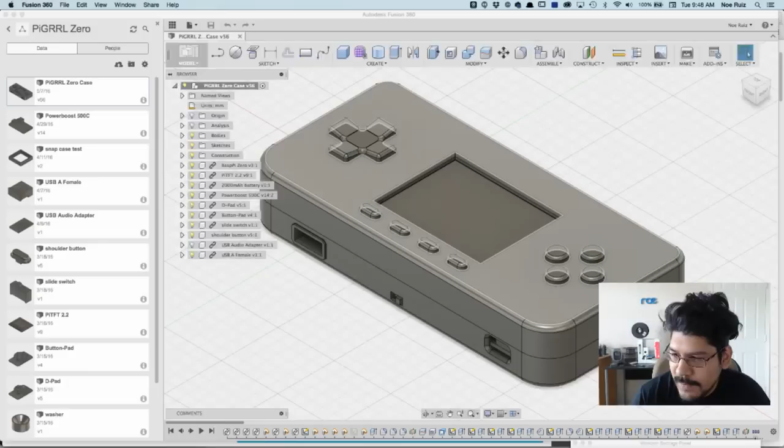So that's pretty much it there - covered the Pi, the availability of the Pi, and what we're going to do. So if I open up Fusion, I already have the case open here.

So this is what we're going to be working with.

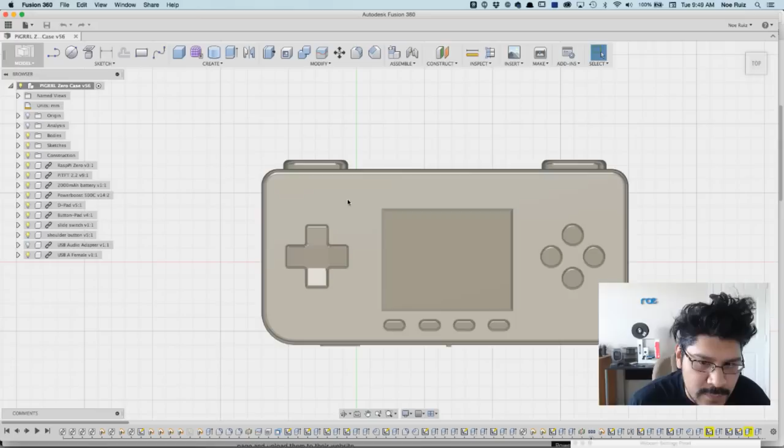All right, first thing I'm going to do is some duplications. I will duplicate this case because I want to have a copy of it. To do that, I'm going to save some resources and hide all this stuff here, all the components. I'm going to go ahead and hide them, right click, show and hide, so that way I only have the case.

I still have, let me hide that one there. Okay, you get rid of, oh yeah, the bottom there is still there. Okay, cool, so I'll make some copies of it. To do that, I have to right click, hit copy, and then up here I hit paste. And it makes a copy.

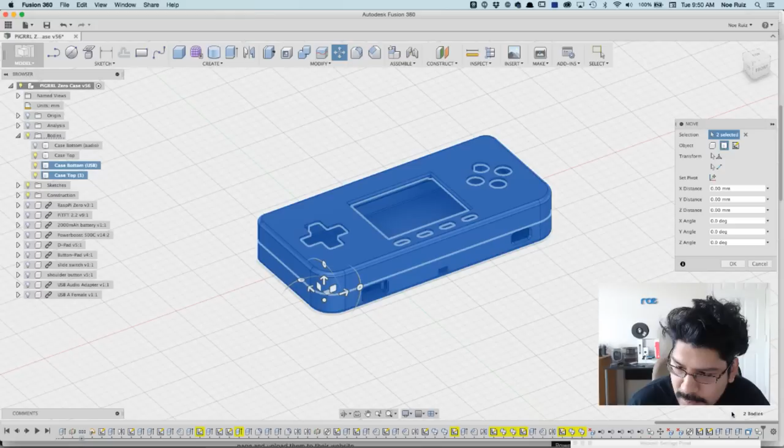Hit OK. I can actually make 2 copies here. See the selection thing? Maybe I can make 2 copies with one go. Cool, I think so, 2 bodies down here in the right corner. It says 2 bodies, I think that's the way to do it. So hit OK.

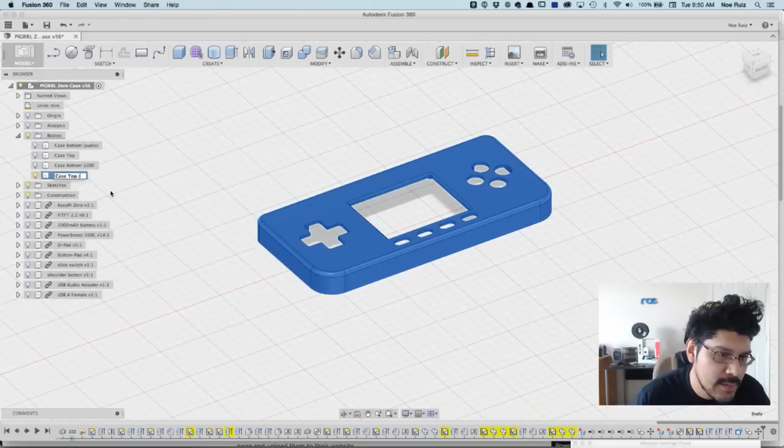And I don't think it did it. It did the top copy, so I have 2 versions of the top. So what I'm going to do is I'm going to rename this one to top, then split, then A, because I plan to make 2, like a left and a right, an A and a B. So that's the first one, and then the second one, which is this guy over here, I'll have to do the same thing.

I'll have to copy, and then go up to the main component, the main assembly, and then go paste. It'll think about it, and then I'll hit OK. And you can see here in the timeline it has added those copies and movements to the timeline, so you can always reference it or go back to it. So okay, I'm gonna name this one split A as well, and that's what's gonna split.

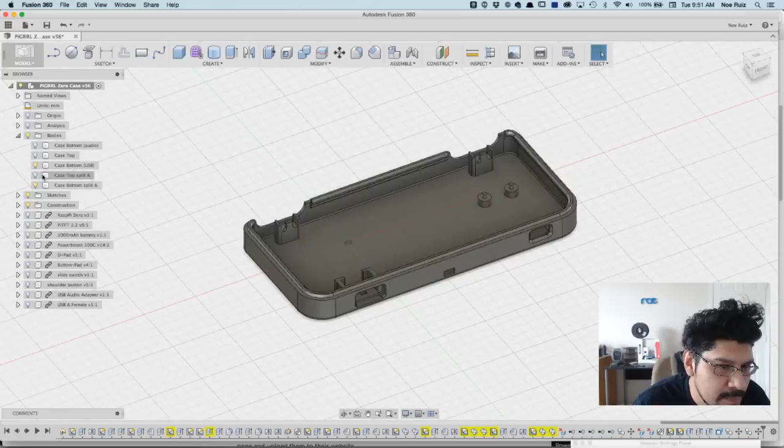All right, so we got our bottoms and our top. Let's start with the top because that seems to me to be the most challenging one. So I need to figure out where the center of this is, and I do have a construction plane that I created that cuts right in half of it, which is right there, I believe, but I'm not sure if I can reference it when I'm drawing a sketch on top like this. So what I'm going to do is...

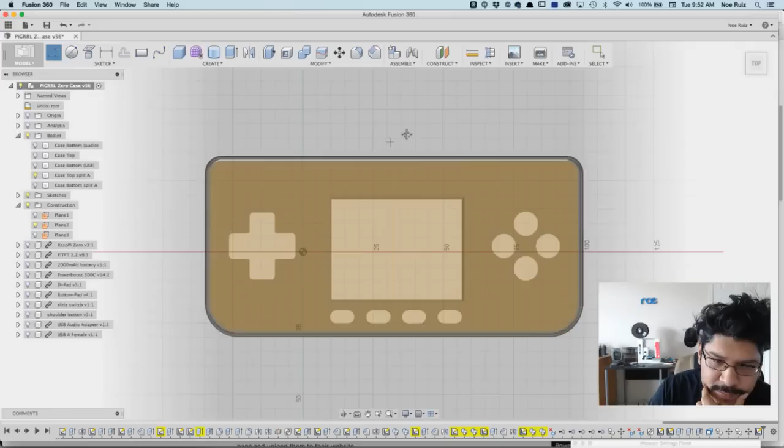Let's go ahead and make a line. I'm going to use not the spline but the line tool, and it's going to ask well, where do you want to cut? I'm going to click on the surface of the top case, and Fusion's going to make a projection of that, sort of outline it out, just a projection of the surface. So all this is projected, and I can reference all these lines and stuff.

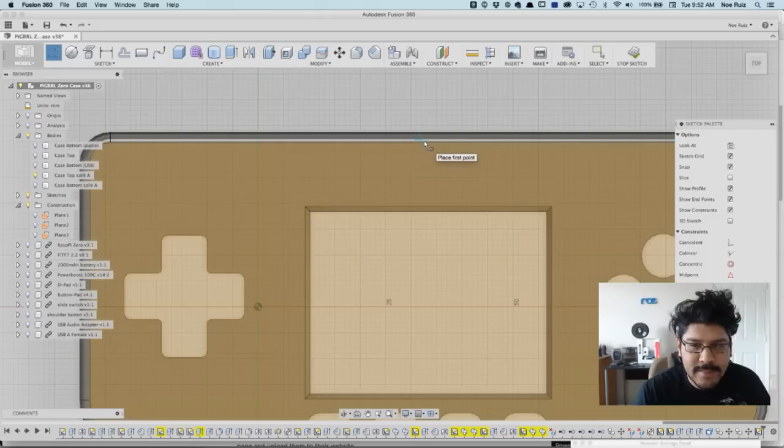So if I roll over here using my line tool, I can find the center spot, and that little triangle you may or may not be able to see, the little triangle with the X signifies that it is the center. So I'm gonna click on this, and now I can start drawing out my cutting thing. I get to choose how big the finger joint wants to be, how long it should be, so I'm thinking probably 4. I'm just gonna type in 4, then click.

And then I'll draw it out a bit over here, so probably 4 to keep it the same. Click, 4 again, click, and I think I have enough room to make just one cut.

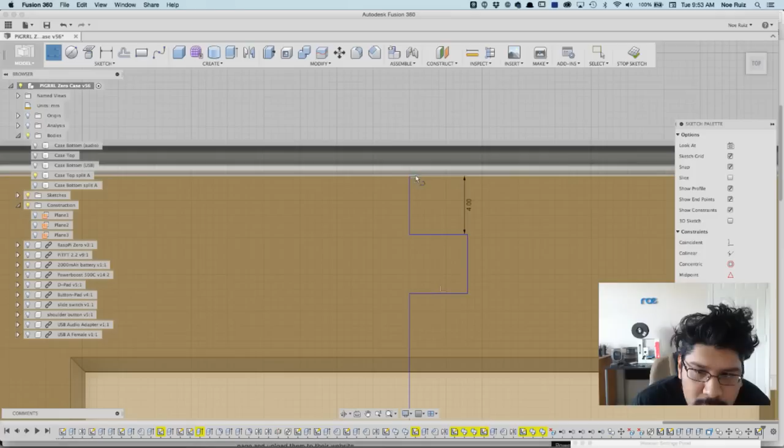And then I'm just going to cut this whole thing down like that. I'll hit escape and drag out this over here. I probably won't be able to because it's locked. Yeah, it's locked, so I'll just continue the line with a separate line and just cut there.

Alright, so that seems to be a good way to go about it. I think that will be okay. I'm going to cut through the whole thing using this line, so hit stop sketch.

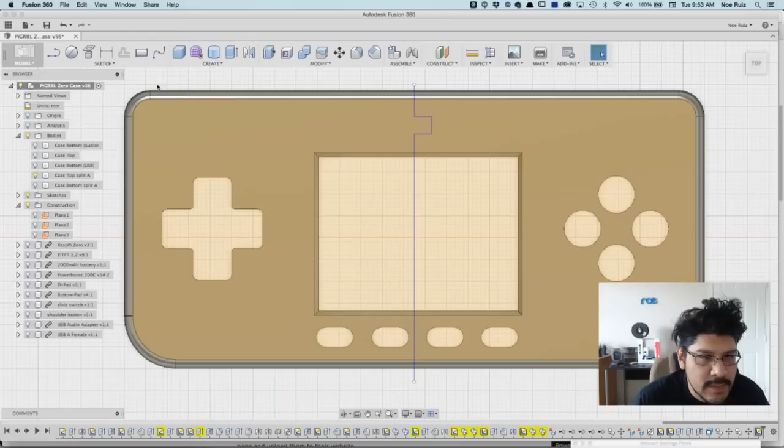So now that I have my cutting tool line thing, I'll come over to the model workspace, and go to patch, because patch allows me to extrude a single line, or this series of lines that makes a single line. So I'll go to create extrude, and click on the lines that we created. This one, oh, magically it selected the whole thing as one. If I start dragging up the little manipulator here, you'll see that it's gonna extrude that single line as a patch. It's not a solid yet, but it's a patch.

And I'll change the direction to symmetric, that way you can cut through the whole thing here, the whole enclosure like that.

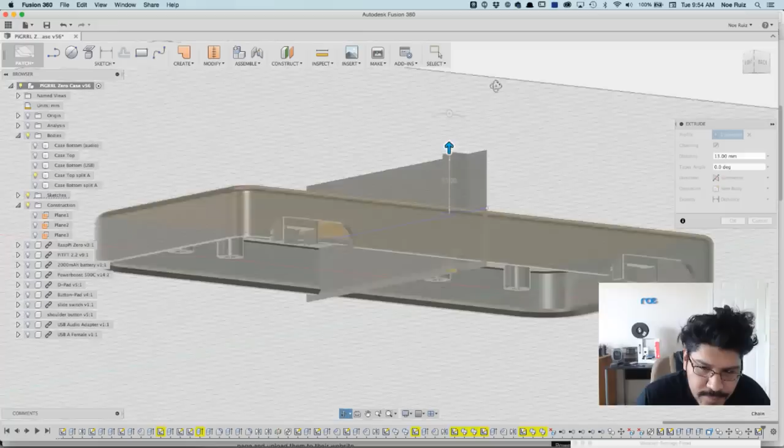What I'm thinking in my head is I'd like to have another key here, but I would have to draw a new profile thing, so maybe I'll work with that in a little bit. Let me just get this first incision, and then we'll work on these layers, or this surface, the plane. So I'm still extruding, I'll go ahead and hit OK.

And now I have this patch. If you go to your body, you can see it has a different icon. See, all these bodies have a solid icon looking thing, a little cylinder. Well, this one's just telling you that's not a body. Even though it says body, it's a patch. So we need to thicken this up.

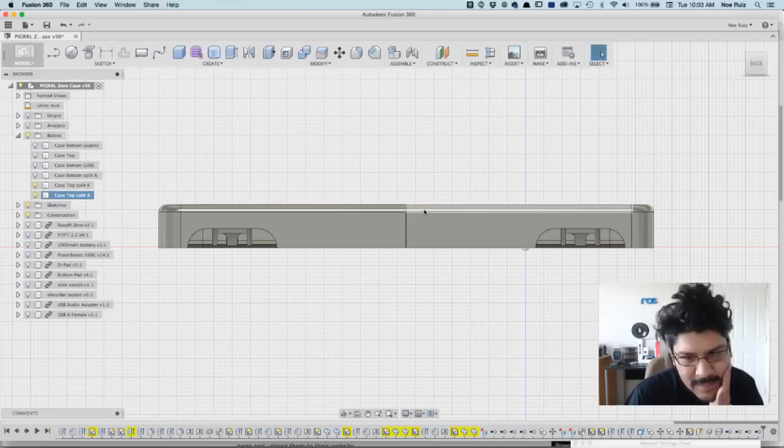So what I need to figure out is how do I add a finger joint to the side of the case here, so that we have more points of friction, giving it a better snap fit. Since it's already cut, I'm not sure how to go about it. I think I could just draw on it and then cut it and then combine the thing. I don't know, we'll see here. Yeah, I'm not sure how I'm gonna do it.

I could just try doing it and then sorting out how, because I have the gap here already, so I wonder how to do it. Obviously, as you sketch, you can't sketch on two different planes at the same time, so it is a little bit of a challenge. It's a mental challenge because I haven't done that before. I'm not sure how to go about it.

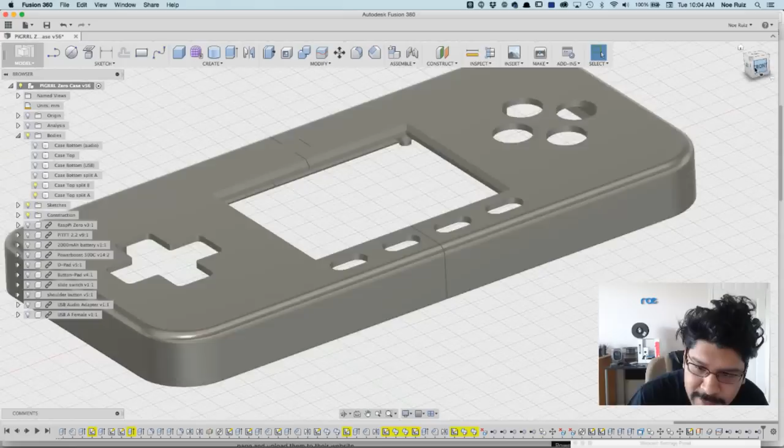So you see how I have that, I just need to rename these. Okay, so I'm thinking in my head, I should bring back those little split cut pieces because I can use those to fill in the gaps, right? So I might need them. So let's call this the cutter top. I know it's the cutter top because we're gonna have quite a few layers, especially with all the planes.

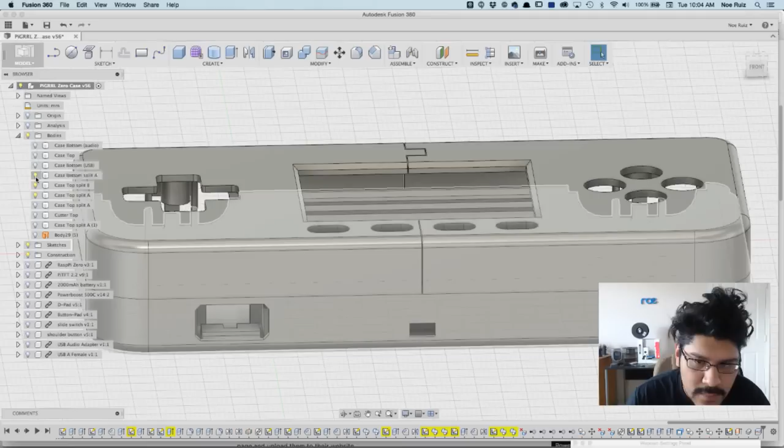All right, let me bring these back one by one. I'm already getting confused. Here's this piece. Let's call this like a bottom. And then I think this one, yeah, this one would be a top. Like that. Top. Like that. Alright, so that way we can use these to merge into the piece because we need to fill the gap and then remove the gap on the next tool. So we'll see how that works out.

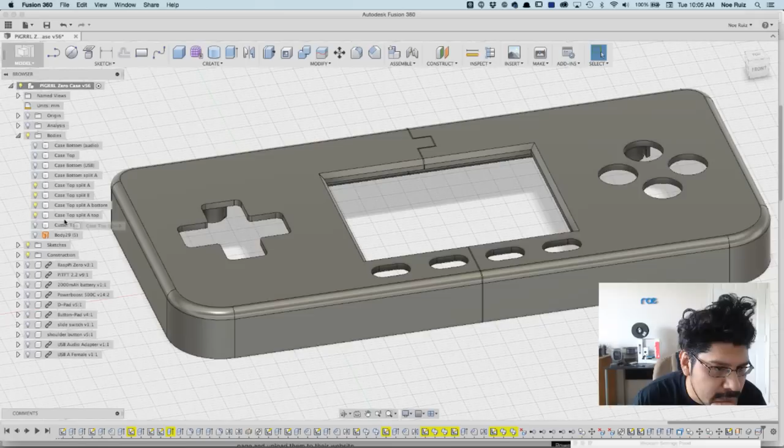But for now, let's hide them. So maybe move them to a better spot. You can just move things in your browser to sort of make more sense of it. I think I'll move split B up here. Yeah, that should be okay. Wait, yeah, let's put it back down there. All right. Maybe down here. All right, that's gonna work hopefully. All right.

You know what I could do is, because I'm thinking in my head like, hey, what's gonna be the exact center? I could just hide all these guys and then bring back the regular case and then just sketch on this one so that it's not cut yet. If that makes sense. So let's go ahead and start with the line tool again. I'll click on this plane, this surface of the case. That way it's sort of referenced. And again, I can just find the center point by hovering over one of the lines of the projection until I get that triangle thing.

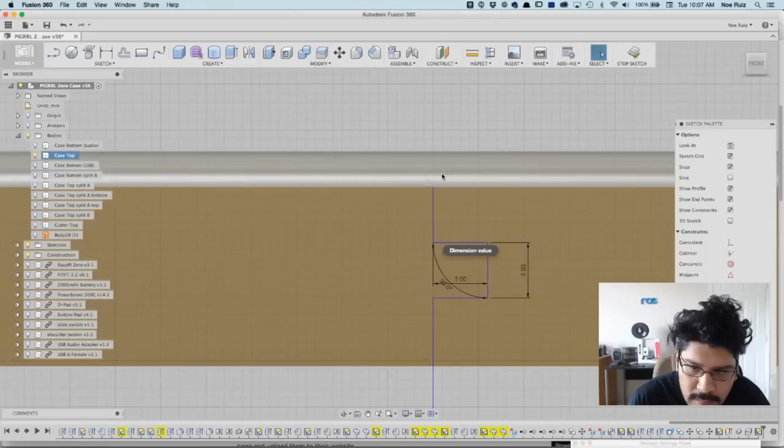I'll click on that, and I'll use the same 4 millimeters, probably 3 because it's shorter, obviously. So 3, make that 90 degree. Click 3 again. 3. Oh no, I locked 3 and then 90 over here. Click, bring it back, and then bring it all the way down. All right, and then arc again to complete this guy up here, like that, and then escape. All right, so I got that. I hit stop sketch.

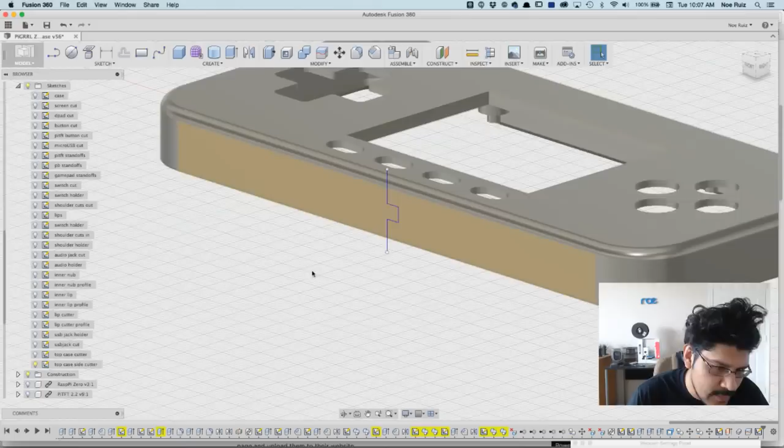And we'll need to do the same stuff. Let me go ahead and hide. Well, maybe leave it for a second. What I want to do is start naming my sketches. So I'll call this one top cutter. Then I need to say top side cutter. I should probably put top case to specify that this is the top of the case and it's a cutter. All right, that'll be fine. I could get more granular with the name, but whatever. I know what it means.

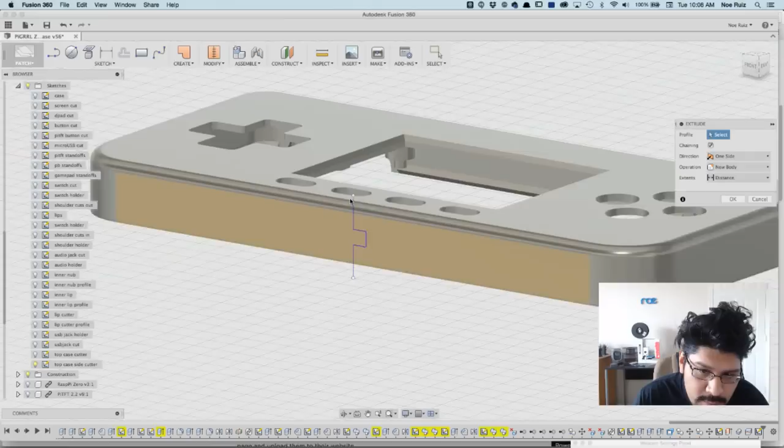So let's go back to the patch. We'll go patch, go to create, and we'll do an extrude of the line we just made, like that. And drag it out all the way this way. Zip. And yeah, that should do it. I'll hit OK. So I'm trying to cut the whole thing here, and there'll be a key or a finger joint right there, just one finger joint, and go again.

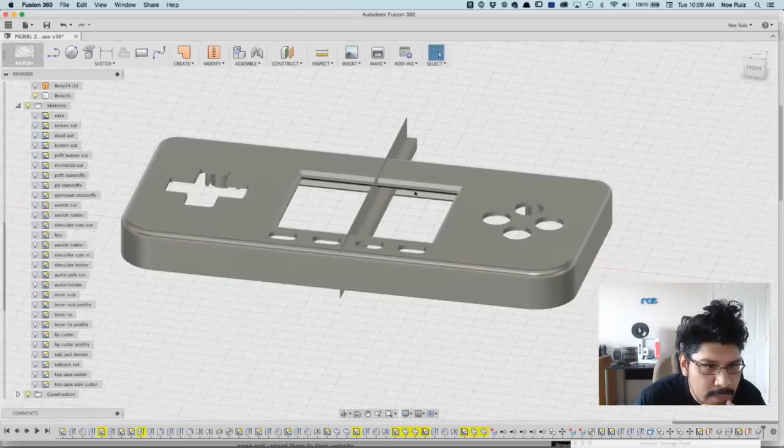And go back to, oh wait, I need to thicken it. So go to create, thicken, select your face, and there's the thickness already set for me because it remembers. It's like a history thing. Okay, 0.2, that's what we want. Hit OK. Now we have our cutter. Call it cutter side top. There he goes. Now we'll switch from patch back over to model.

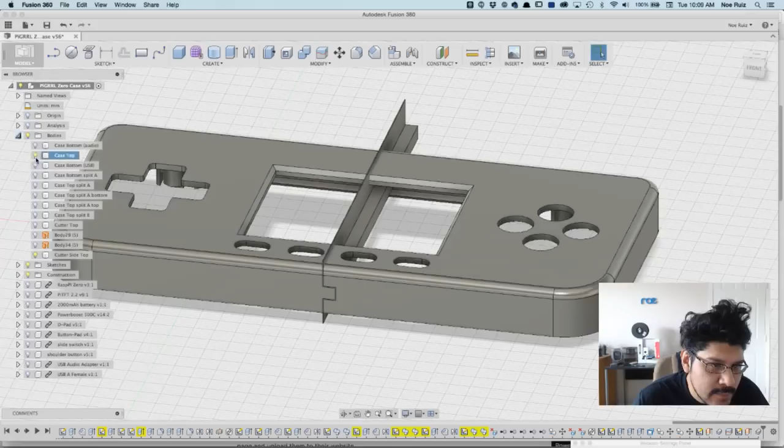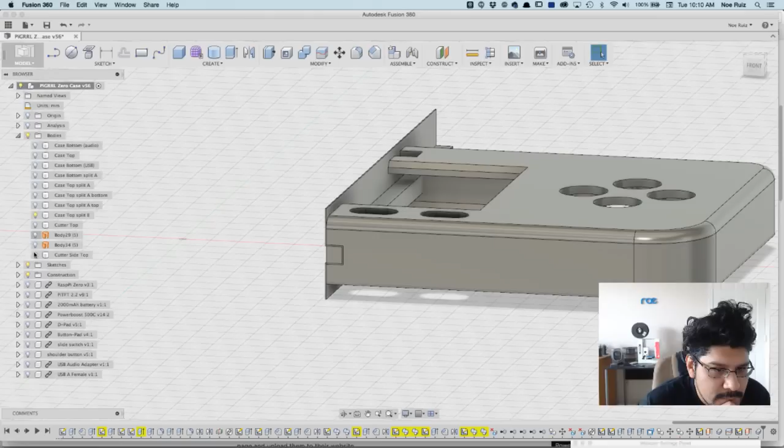Go to split body. And instead of splitting this guy, I think I should split the actual split case already. See how that would go. So let me hide top case, and then bring back, that's the cutter, that's B, and this one's A. So I guess we will, and there's a gap there, obviously. I'm curious how this is going to work out. Silence. That's the thinking happening.

Huh, and there'll be an overhang too. I'm thinking about, since it's going to print this way, we're going to have a bit of an overhang issue since it's just going to be like that. So maybe it's not a good idea to add a finger joint here. You see what I'm saying? Like if I cut this, then I have this 3mm bridge, which will certainly sag. So that's not good. So maybe that isn't a good idea. Wah, wah. Yeah, I don't think it's a good idea, guys.

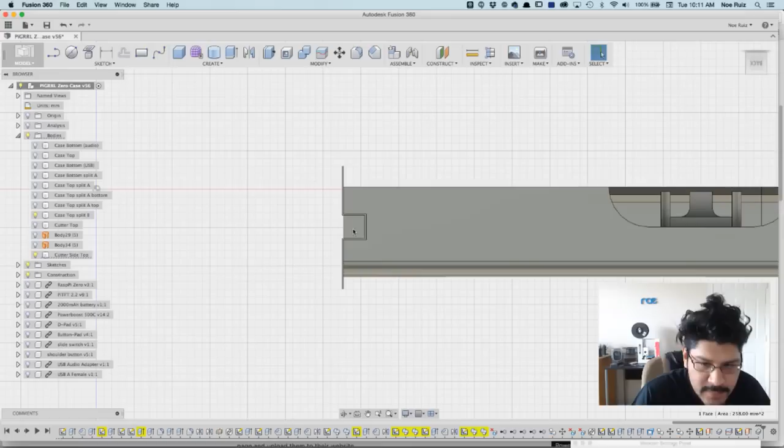I could change the shape to be a bit of a chamfer, you know, like make it like a triangle or something, like a 90-degree finger joint. But then you're still gonna have a bit of sag because it's just printing like this. So maybe this is gonna be the way to go, because I'm just gonna add more complexity to it. So maybe this is the right way to go. Just have one finger joint. It's better than having no finger joints, I think. What do you guys think? I'm curious to hear what you guys think.

Over here. Make Lego blocks from the case, says Yanni. Benny Hill. Yeah.

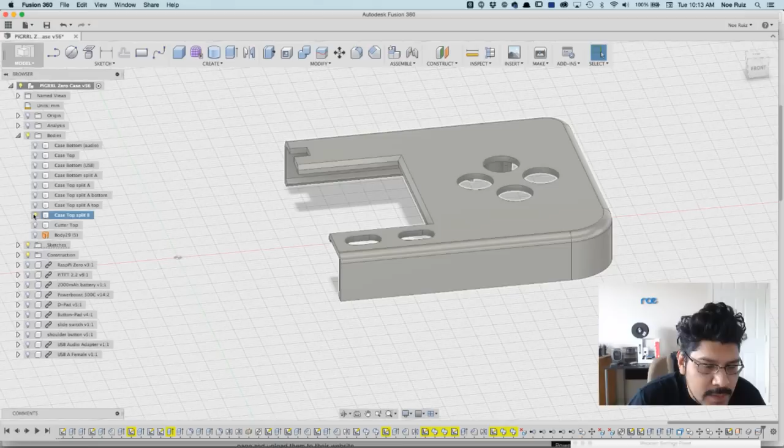So let me hide the split, the top piece, and then we'll do the copy of the bottom, which is B. Wait, no, I never did a duplicate of the bottom. Yeah, I did. Split A. Here it is. All right, cool. So let's cut this guy in half. See, since this one has more surface area, I can do all sorts of finger joints, and that's fine. It's a lot better than the top. The top was really the one where it's going to be difficult to add finger joints to it, but I think one will hopefully be okay.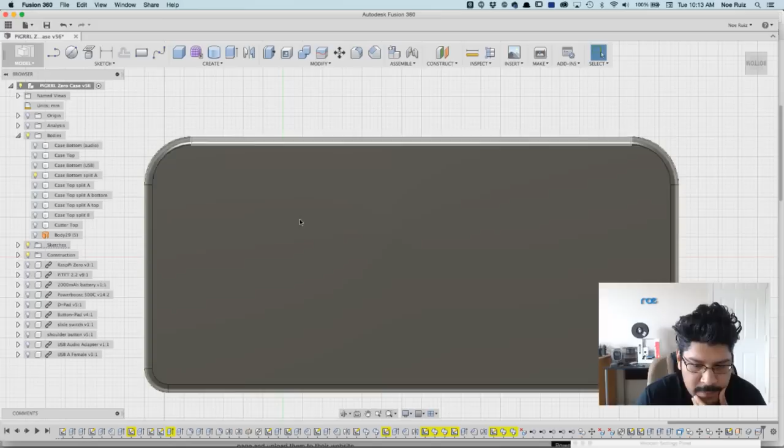Of course, the easier thing is just to cut the thing right in the middle, but I wanted to make it a little bit better, especially utilizing that technique of doing finger joints. I figured that would be kind of interesting to do, because I've done a tutorial on it, but it was on just a piece of nothing. So at least this way I can do it on an actual project, right?

So let's start again with clicking on the line tool and then clicking on the bottom surface of this guy so I can get a reference point and a projection. So again, I'm going to roll over till I get that center point. And I could probably make these a little bit bigger. So I'm gonna make it 5. First, the length and width of the fingers would be 5 by 5.

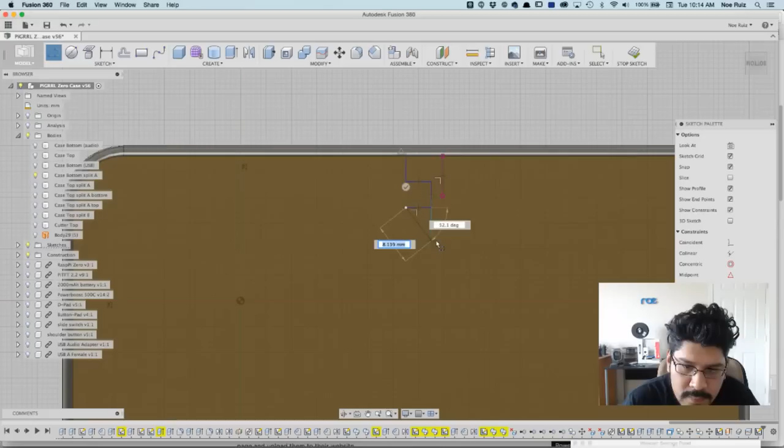And what I'll do here is, if you guys didn't see the tutorial, I could just make a little bit of it. So you see how I made just this one instead of drawing all the way out. I can just do a pattern to make things easier for me. So that's what I'll do. I'll go to Sketch, go to Rectangular Pattern, and then my objects, or my lines, will be these 4 lines. And then I'll change the distance type from extents to spacing, because I know the spacing needs to be 5 millimeters.

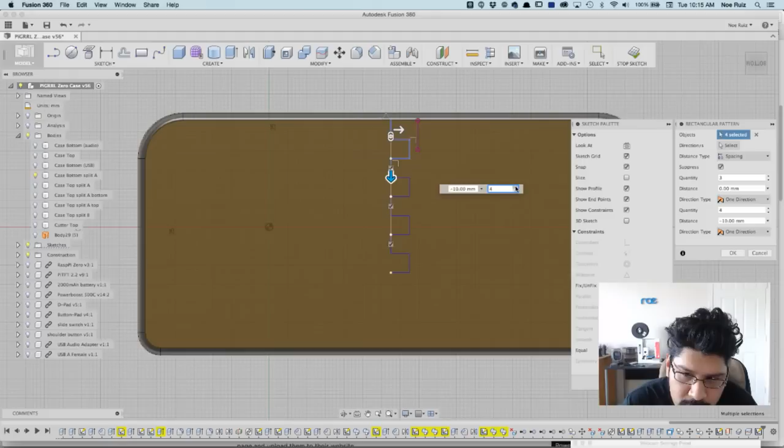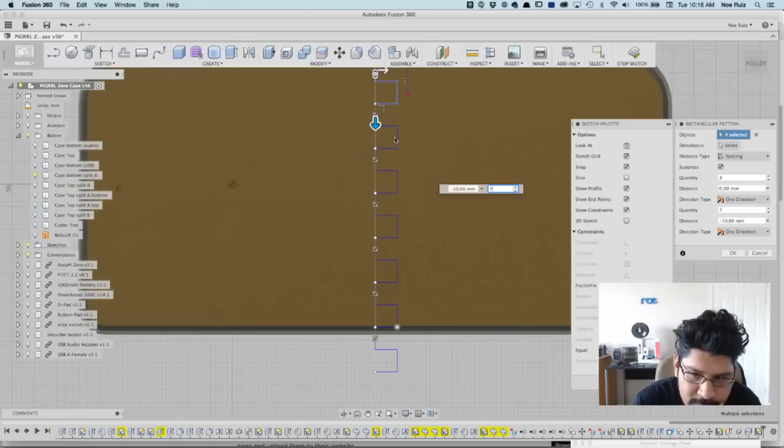Or 10. Is it 10? 10 millimeters. And then you can see I can add more quantities. So 4, 5, 6, 7. That's a little bit odd there. I'm not sure if I like that, because this area here is actually the fillet at the bottom. I don't know if I want to cut it at such an oblong kind of area, so I'll have to mess with the thing a bit.

So I'll hit OK, just to confirm that, and then I can just move this a bit. Hopefully select these guys. Oop. I'm just gonna click and select these lines that were made to make the pattern, and I'll hit move and see if everything will move with it. Oh no, it's not moving. Sometimes this happens where it won't move. Oh, it won't move because it's referencing the projection here. So I need to get rid of that constraint.

And now let's see if I can remove it. All I did was I clicked on the little triangle icon, and then I hit remove. That's too many. There you go. Let's see if I can move that now. Will it move? Yes, it will move. Wonderful. And it moves the whole group too. So again, I'm trying to move this because I don't want that weird oblongness here at the fillet.

So let's see if I can just input some values here. That's too much. Maybe 4.5. Nope, it needs to be less. So let's try 3. Maybe just 3, normal 3. And that's not too bad, I think.

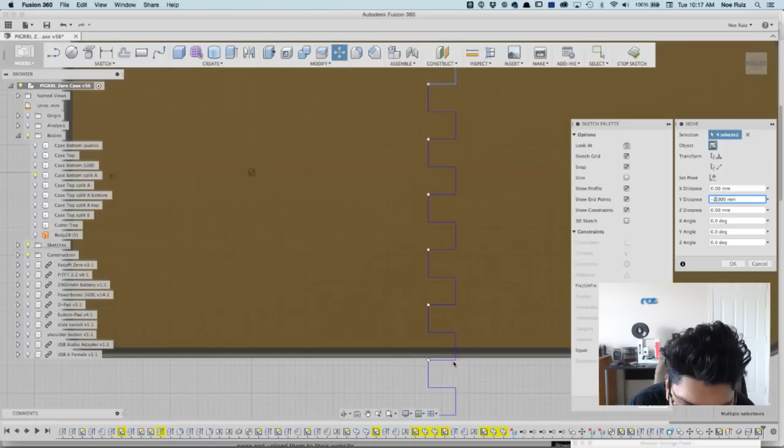Of course, I'll have to extend this up here. Maybe less, maybe 2. I think that will do it. Yeah, you see how there's just enough clearance there. Yeah, I think that'll work. So let's hit OK, and then I'll add to this guy here with the line tool. Just extend the line upwards. Not click and drag it, but add a new one, because if I click and drag it, it'll mess with the pattern. So that's all I want.

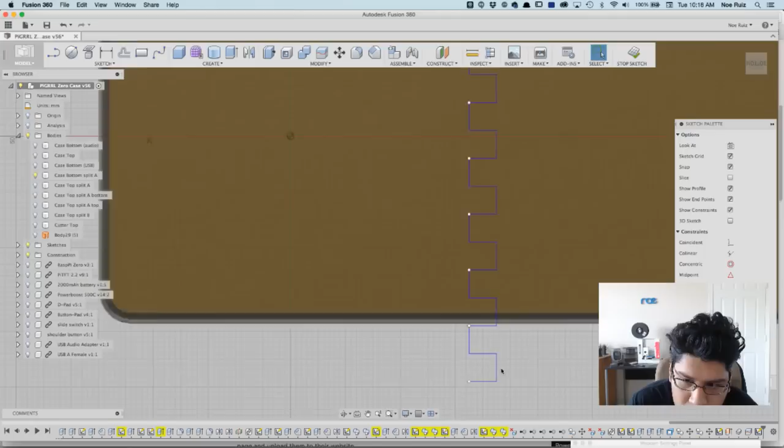Okay. Yeah, I think that'll be okay. I wish I could center everything, but you know, I think it'll be just fine. Alright, let's hit stop sketch. Go back to patch, and then we'll create an extrude from the line we just made. And you can see it's not going to select the whole profile because of the pattern tool. So we just have to click individual sections of it until we select the whole thing. There we go.

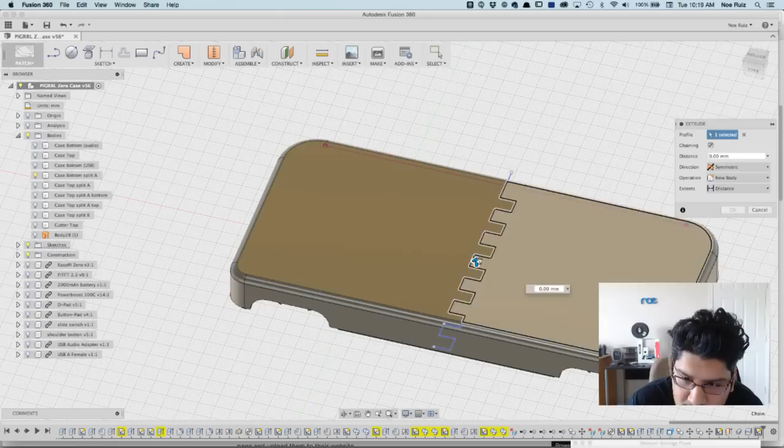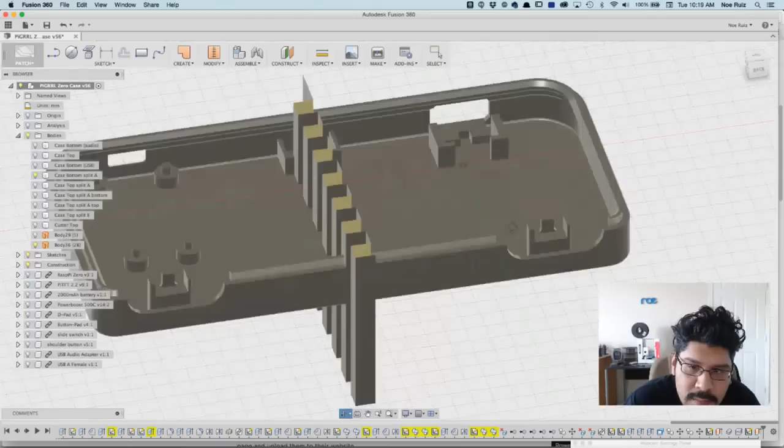Make the direction symmetrical. Pull it out. Yeah, you can see the little slide switch area here is going to have some overhang issue. So I'll probably move it. But I kind of want it in the center because, oh wow, you can see it's cutting here to the little wall. Yeah, that might cause some problems. So I'm going to try to cut it probably more over here. So what I can do at this point is just move it.

Well, I need to thicken it first. So let's thicken it. Look at that. 0.2 mm is again our tolerance. Now I'm going to go to model. Rename this to case bottom cutter. Or probably cutter bottom, to be more in line with this guy here.

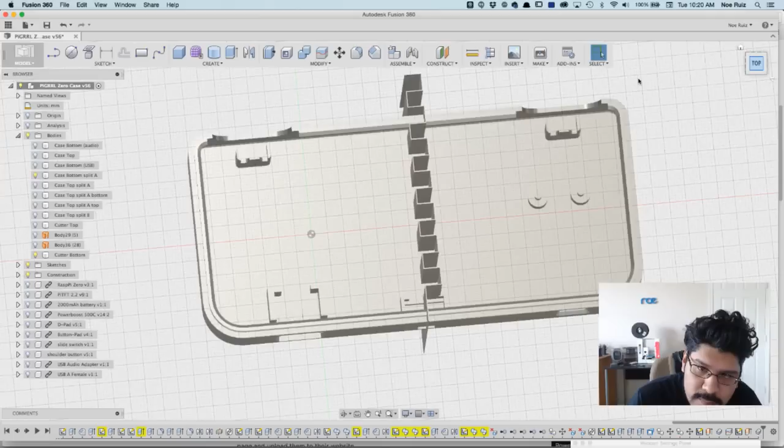And we can move it at this point. So I'll get the move tool, highlight that. Let's go to the top view and then try to get it away, maybe right there. This is a good spot. It's all arbitrary. It matters, but it doesn't really matter if it's more on this one or more that way. I think it'll still be smaller than 100 millimeters. I hope. So yeah, now we can split it at this point.

So to do that, again, modify, split body, click on that. Select our splitting tool. Whoops. That's just one face. I need to click the whole thing.

I need to clear the frog in my throat.

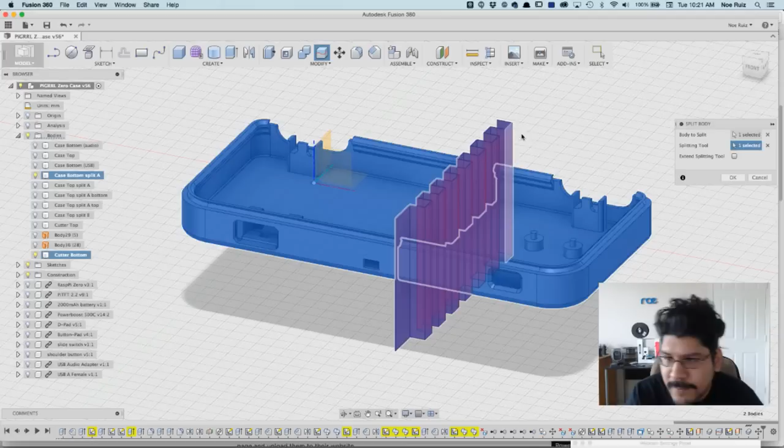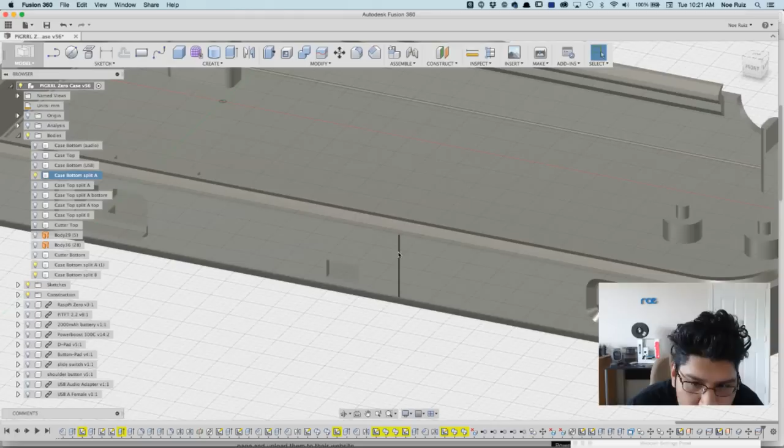Sorry about that. Alright, now we split it. And this is A and this is B. Let's call this split B. And then we'll find this guy here. This is the cutter. Hide it. And we need to find the center thing, which is probably this one here. Don't need it. There we go. There's a nice little gap. Remember, we need that gap for printing reasons.

So, it kind of looks messy, a little bit like a puzzle piece, but I think the way to get rid of that seam is going to be a lot of sanding, maybe some XTC-3D coating, and a lot of sanding. But those are the joys of having a printer with a small bed, you know. I'm going to try printing this on the Printrbot in the back here. It'll take a little bit, but, you know. So I think that's it.

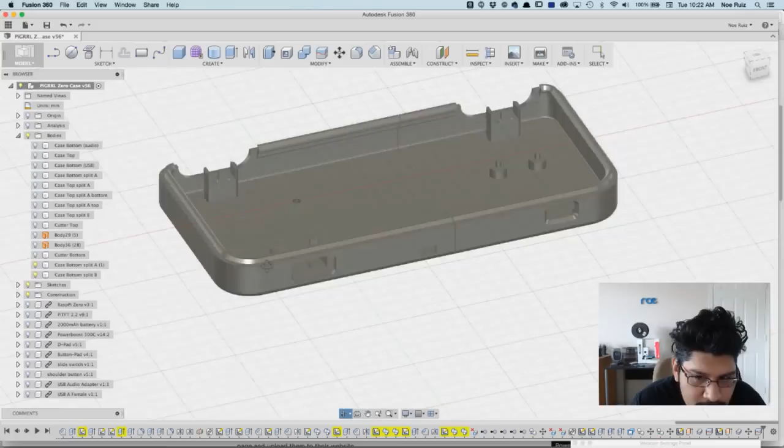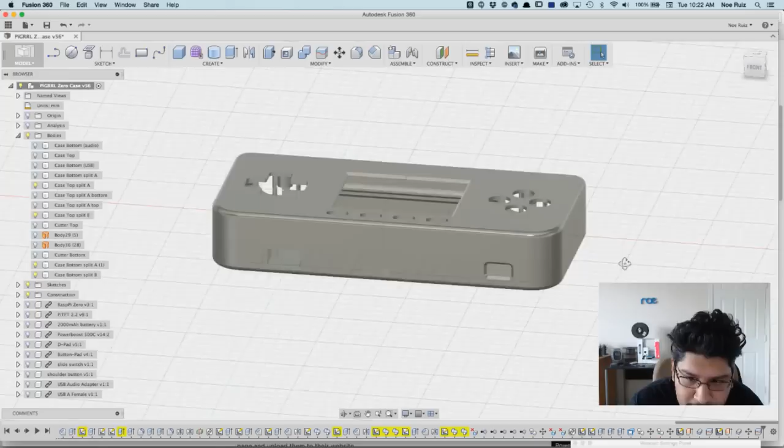No, we need this one and this one, right? Yeah. So there's our pieces cut up in some strategic way. Always thinking with 3D printing in mind. Am I creating overhangs? Is this tolerance going to work? Is it going to actually snap fit together? You have to be not cautious, but aware of all of your geometries. You don't want to create more problems. So I think that'll work. Hopefully it works. I'm going to go ahead and export these out.

Do you guys have any comments about this? Whoops. Let me just go to the window. Cut around the body, says Luke. Could you be more descriptive of cut around the body? Not sure what you mean.

So what I'm going to do at this point is export this bigger piece and see if it's within the bounds of 100 by 100. Because that seems to be the smallest bed, I think, for all the small printers out there. So let's export it out. Okay.

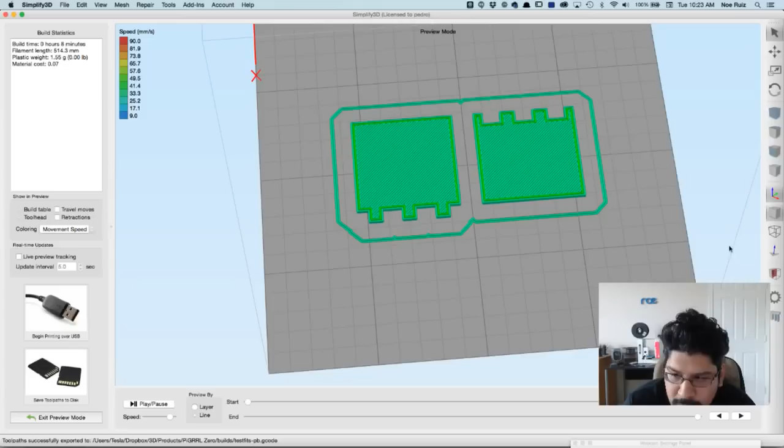I should have brought it into Simplify right off the bat. You guys know about that? You can right click, save as, set the output here, send to printer, and Simplify is already selected. I'll hit OK, and it'll actually bring it right into Simplify3D. Oops, I'm in that weird mode, so I just need to get out of that. There it is. Look at that, it fits, absolutely fits.

Check that out. Yeah, it's 81 by 63 by 73. Pretty cool. Hit done. And let me look at my printer settings. This is a Printrbot, of course, Printrbot Play. It's in the background over there.

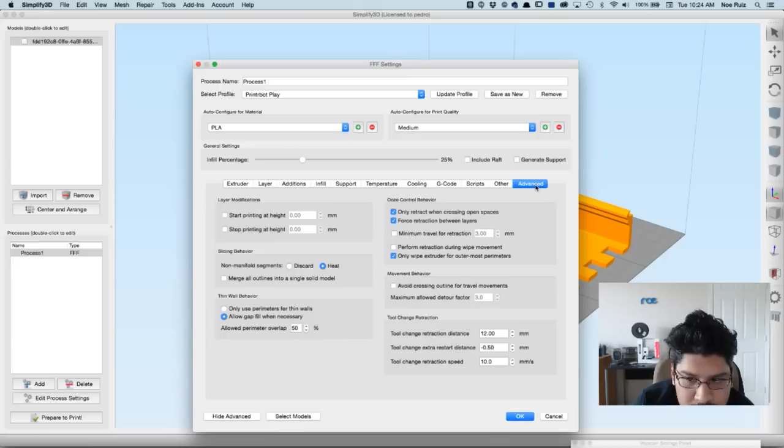And I have a layer height set to what I like. Some solid layers, 2 millimeters for the perimeter. My speed is, I believe, 60, 90. Yep. And everything else is sort of standard. All right, hit OK. Let's do a little bit of that. Cool. All right. I think that'll do.

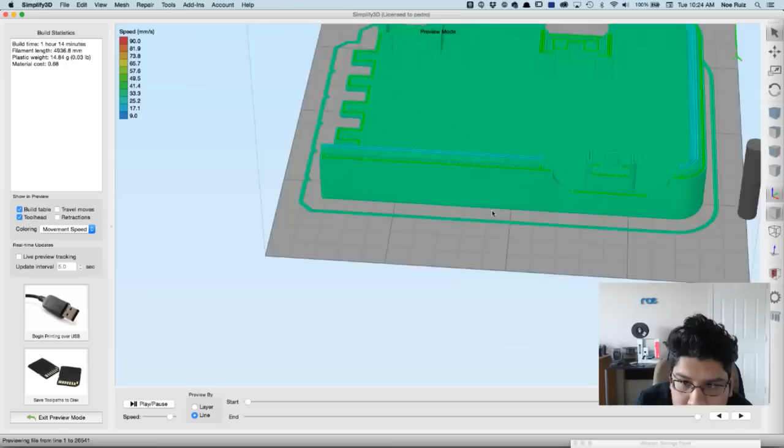You guys want to see me print it? I'm trying to be more interactive in chat. Let's see if... nope. Hi everybody. Hey Kirby. Just cutting some stuff up.

Alright, well I was hoping that Luke had more of a descriptor about cutting around the body, because I'm curious to hear what that entails, what he's talking about. Maybe he had a good idea. But again, this is test 1. I plan to do other tests on cutting to get the right cut and to sort this stuff out. Maybe I'll try out that sort of finger that's more like a

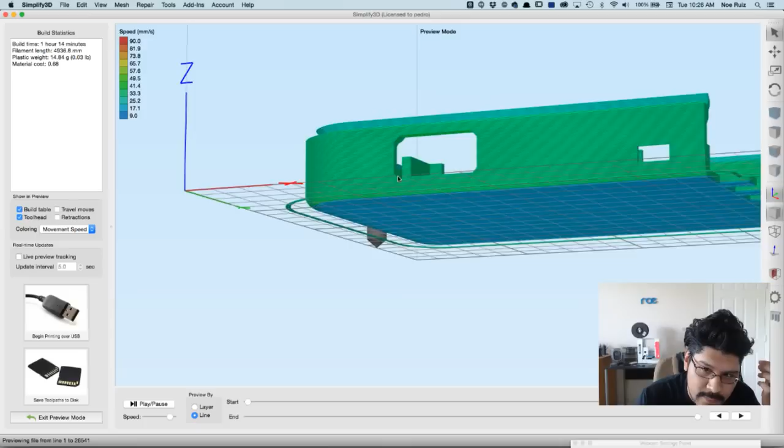triangle. Maybe that'll work, because when you're printing upwards like that, you don't want to have this bridge, because then you have a lot of sagging, especially when there's nothing that catches the bridge. Like this is an example of a bridge that will print okay. See, it's 90 degrees. You usually think that's bad for your printer. But if you have another area to catch the bridging, then you're typically okay, especially over such a short distance, like that one there for the slide switch.

So, enough dilly-dally. I'm going to plug in the printer. I don't have it plugged in. That's why I don't have it plugged in all the time: there's a very loud fan that never turns off. Could add a switch or something, but you know.

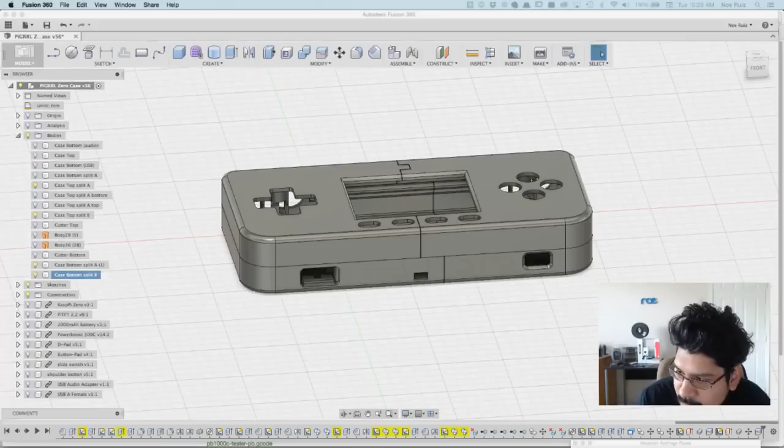Alright, here we are. Kirby's asking, are the cuts offset for each half so it doesn't snap in half? Yes, Kirby, absolutely. If you look here at the CAD, you can see that I have a bit of a tolerance gap here. I used the patch extrude and thicken to make a 1.2 millimeter gap between the cutting. So that's what we did.

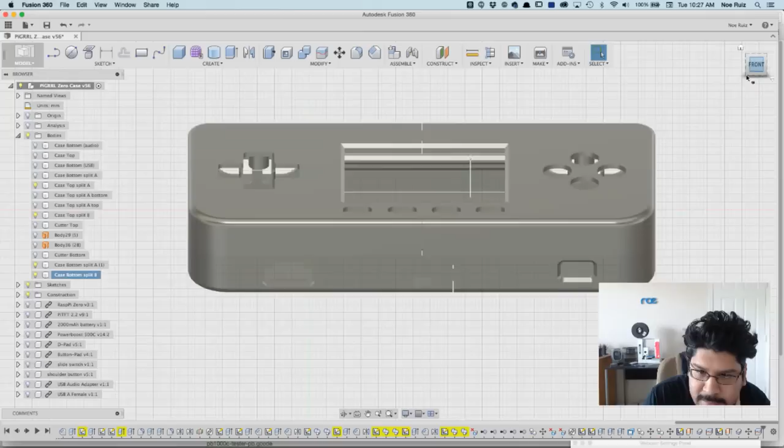If you remember a tutorial I did a little bit ago called making finger joints, I basically did the same techniques, and I hit a snag because I was trying to add a finger joint here on the side of the case, but I realized I'd just created an overhang problem. So that's why I opted out of that. I had an idea of making a triangle finger joint so you'd have less of an overhang issue, but I still don't think that's a good idea. So I avoided it, that and to keep the stream a little short. I think that'll be okay though.

And you can see I didn't add a finger joint in between the PiTFT buttons because it's such a small distance that I don't think a finger would work well there. But this is just a test to see if it's good. If not, I'll refine it and add some more detail. But I'm about to print out the bottom half piece, the longer bit.

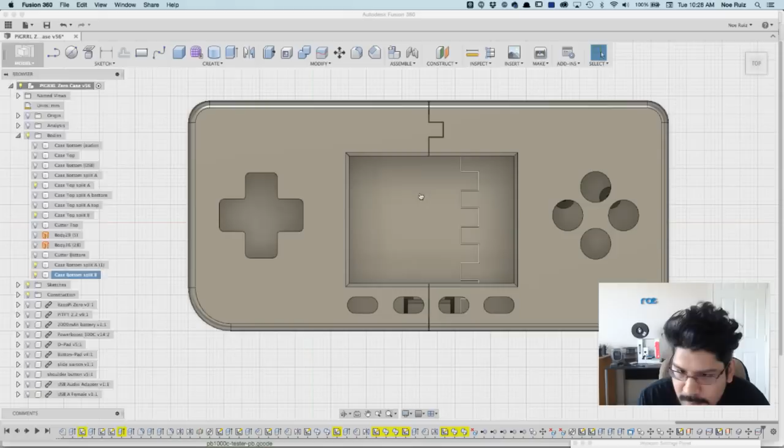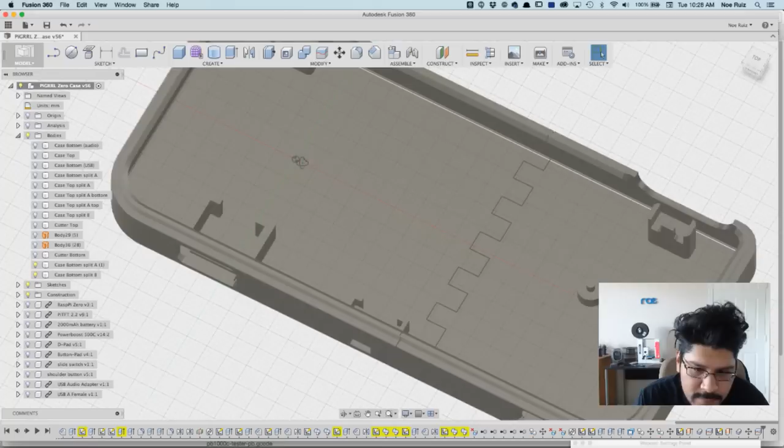And the reason why it's longer is because I needed to avoid cutting the switch holder in half. If I cut it right in the center, I'll have that overhang issue where the bridge isn't being caught. So that's why I cut it over here. I could have cut it over here too, but it's arbitrary. It doesn't matter where I cut it, as long as it's not cutting some important details.

In here, I'm going to connect. I'm using OctoPrint, latest update. I need to export out. Let me heat it up real quick. 220. Terminal. Here's my control stuff. Yeah, it's a little slow because I'm streaming and stuff, but let that heat up while I export the thing.

Kirby's in California. Cool. Enjoy your stay, man.

And then I'm ready to export. I'm gonna call it, oh man, it's gonna be a long name.

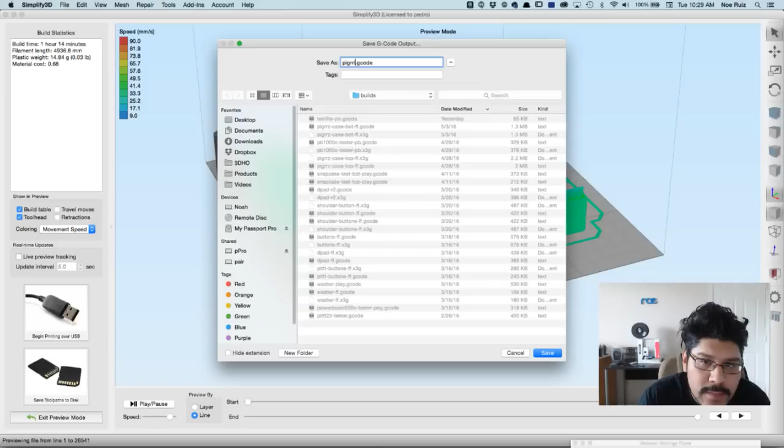PiGRRL Zero bottom A, yeah, and then play for Printrbot Play. Okay, we could get more granular with the names and whatever. Upload it, and as soon as it starts printing, I'll let it print for a little bit, and then I'm gonna cut the stream because it's probably been an hour, so I don't like to keep the streams too long. But hopefully you guys got something out of it.

Just as things to be aware of when you're cutting 3D printed pieces down. You could just cut it in half and have a straight cut. But if you're a little bit more, not smart, but strategic about it, you can make it so that they snap fit together as opposed to just clamping them together with, I don't know, clamps, right? So that was the whole point of the tutorial.

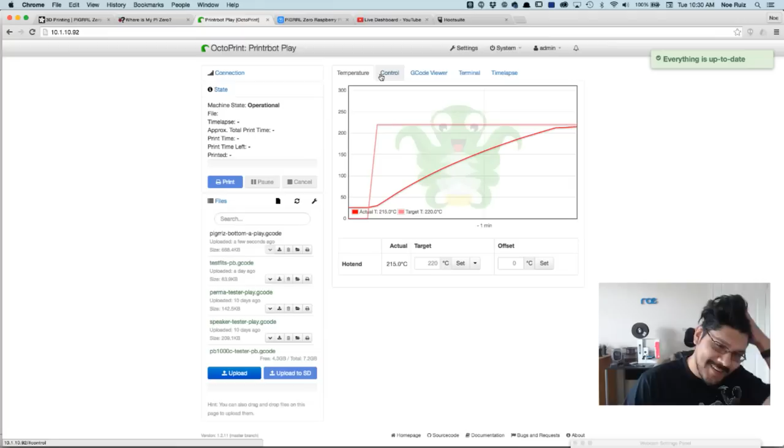Again, this was a requested thing. People have small printers. I have a small printer, or have a printer with a small bed. So cutting up pieces can be an art. It can be an art. So printer's ready to print.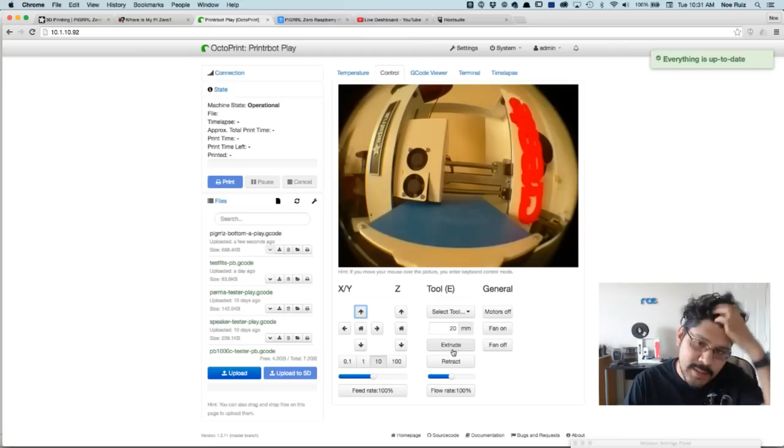Let me do a quick purging of it, so I don't have the right start G code to do a little bit of a purge. Most printers have a start G code where it purges for you, but I have neglected to put that on this one, or at least on this version of my slicer. So I'll extrude.

Go up a little bit more. There we go. Some boogers here. All right, that's good. Of course, you get a purge when you do a skirt, but I like to really purge it. All right. There's a little countdown. 5, 4, 3, 2, 1.

If I can make this bigger. Yeah. The feed of the camera, because I'm streaming, so I'll report back to you guys, let you know how this turned out. It says it'll take about an hour to print this part, so oh man, it might take 4 hours to print this whole thing, which is good. I gotta test this out anyway.